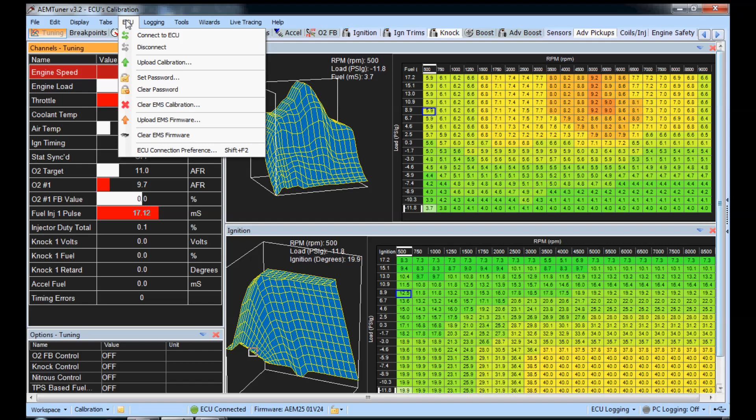So go up here to ECU, upload EMS firmware, and it shows here what you're currently running, 1.24, and what you're going to go to is 2.02. And you don't have to upload a calibration. I'm just going to throw this in here. It doesn't matter which one. You don't have to do this right now. You can do this after you've done the firmware.

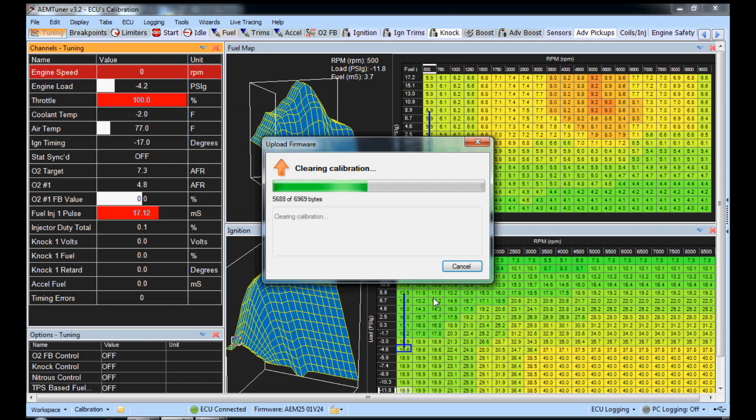So click OK. Now, make sure that you do not lose power to your ECU from your car. Like if your battery has low voltage and you lose connection during this process, you have to clear the EMS firmware. It's a problem. If you have USB connection problems during this process, you have problems. So just make sure that you have good battery voltage everywhere, and also make sure that your laptop is either fully charged or not about to die.

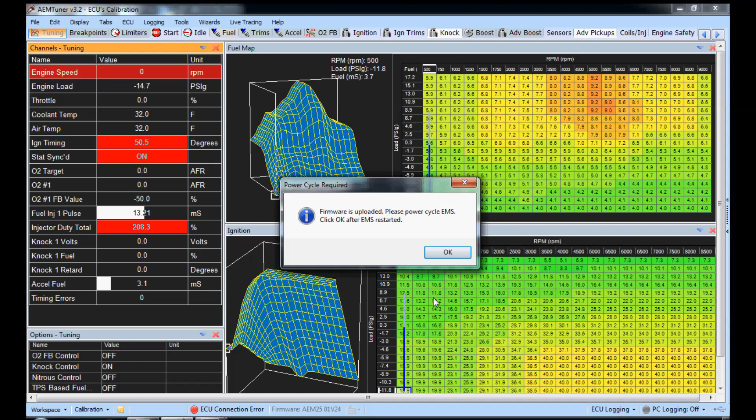So if you lose connection during this process, it's kind of a pain in the butt to go through, but it is possible. So if you do get connection errors or something, I'm going to make another video for that. Don't worry, I got you covered. So power cycle the EMS after it's done. Just follow the instructions. Power it back on. Click OK.

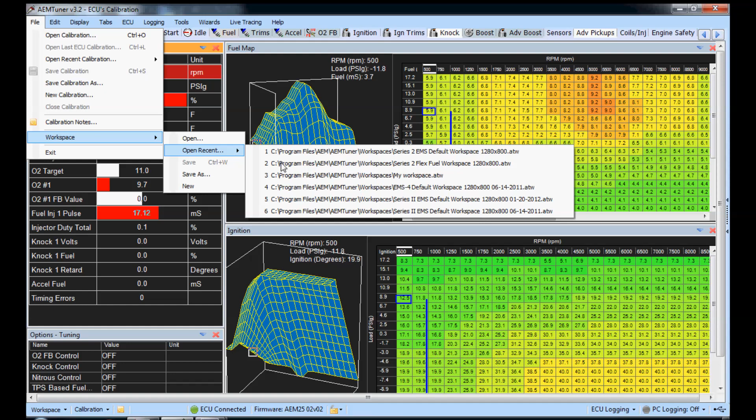Alright. So now you've updated the firmware. Now you'll see down here it says AEM25 2.02 down at the very bottom. So now go up here to File, Workspace, and we'll just use the default Flex Fuel workspace. Okay, so this is how this is going to work. Over here, let's get all this set up first. Actually, sorry, this was my last video, but these should be all your default settings. Sorry, I was doing a practice run.

Anyway, so the first thing you're going to do is you're going to select your input. I highly recommend one of the switches. They work the best, 2, 3, 4, 5, 6. So let's say you want to do switch 3. So we'll select switch 3. That's going to be your input. It's just not shown on here, so go to insert, type in switch. Let's do 3 falling, 3 rising. Okay, so now we've inserted these channels.

So now here's the thing. One of these needs to have an edge, whether it be falling or rising. So you could have the falling edge on, you could have the rising edge on. It doesn't really matter however you do it, but just know that one of these needs to be on. I've used on both of them and it works, but it seems to be a little smoother signal with one on and one off. So you got that on. Switch 3 is your input.

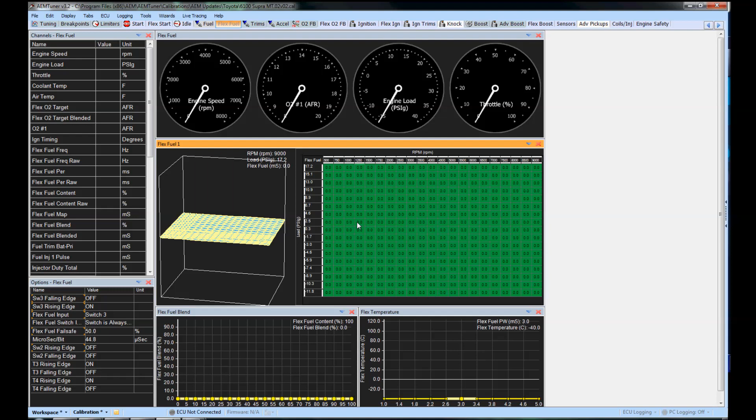So this is your flex fuel map, right? These are your values. So if we were going to start from scratch, let's select this whole thing, put it in here. Come on, come on. Okay, and then let's just add like 20% or something. AEM Pro style. Okay, so we just added 20% to the whole map. It might be closer to 30 or something like that, but whatever. This is just a demo.

So what we did is this is going to be our flex fuel map now. They're two completely separate maps. So what you're going to do is you're going to blend in between these values. Oops, sorry. Dang it. In these values. Oops, doggone it.

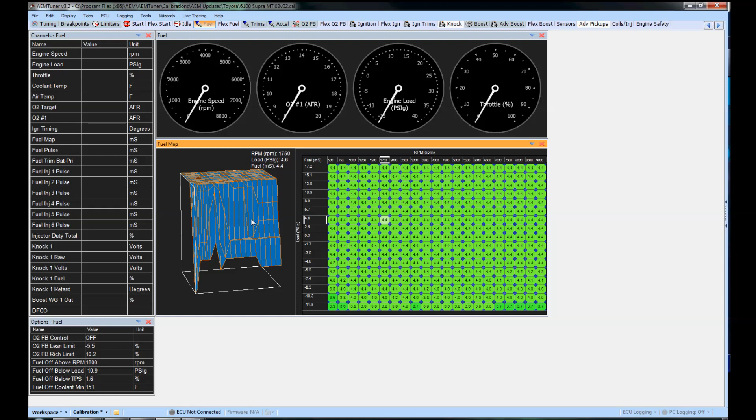It's because it did the copy and paste thing, but in between whatever these values were and whatever these values are. Okay, so the next thing we need to do is set up this one. So let's say that you're primarily going to be running E85, and this right here is going to be the map that you tuned 100% on E85. Okay, so we'll get the E85, we'll set these, oops, we'll set them to 100.

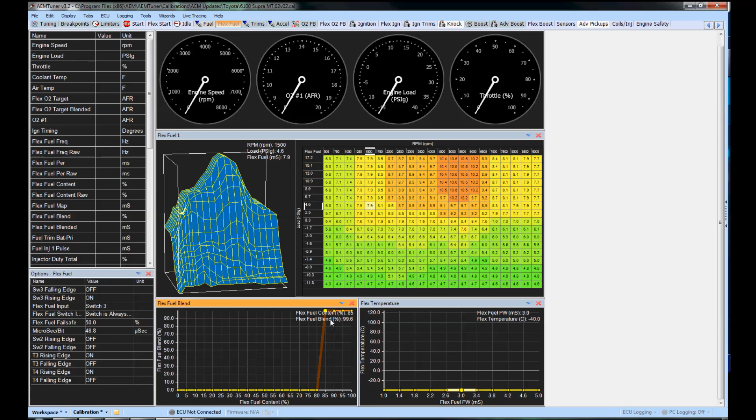Okay, so what we just did was, whenever your flex fuel content coming in, and it'll tell you right here, is 85% or higher, you will be running only the values in this fuel map. It won't have anything to do with this fuel map. Okay, and then everything in between, right there, is going to be blended.

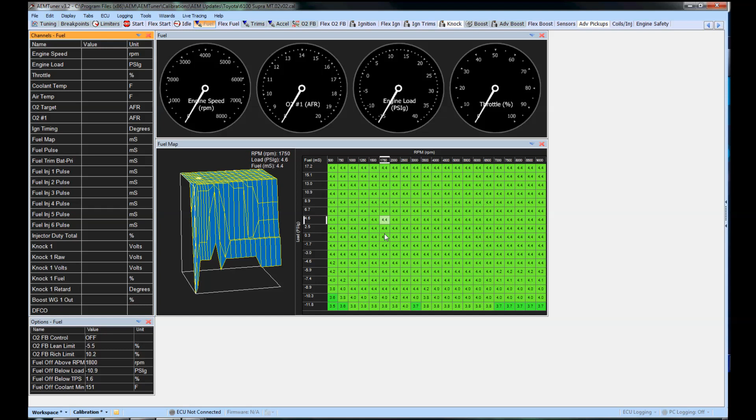So let's say you're on 50-50 right here. Then that means you're going to be running a 50-50 blend of, let's say at zero, basically at atmospheric at 1750, at 7.9, right? And then if you go over here, 0.3 at 1750 right here. So it's going to be running a 50% blend in between this 4.4 value, this pulse width, and this pulse width. Okay, so it's a mediary point, so it's blending between these two maps.

It says, okay, this is my E85 map, and this is my pump gas map, and I'm told that if I'm at 50%, I'm going to be right in the middle of these two maps. So it makes a calculated value. Now, if you guys were going to be doing like E100 or something like that, and you want a really fully blended table, you can just do something like this, if this map right here represented a 100% ethanol blend, not an E85.

This one right here, this flex temperature, this is only for logging purposes, but it is really helpful for knowing fuel temperature as it's returning back to your tank. Again, there's no trims based on this, and this table will depend on what sensor you have. But if you get the one from AEM, or you can look it up online, they give you what it should be, the temperature versus the MS on this. So really helpful to log.

And then let's see what else we got. We'll start over here, flex start. So now you can see I already did that one table, and it takes the values from this table and it puts them right here, same table. Okay, now these are all your flex start maps. So if you're running 100% ethanol, you would be using all of these maps and none of these maps. Make sense? Hope so. Pretty simple.

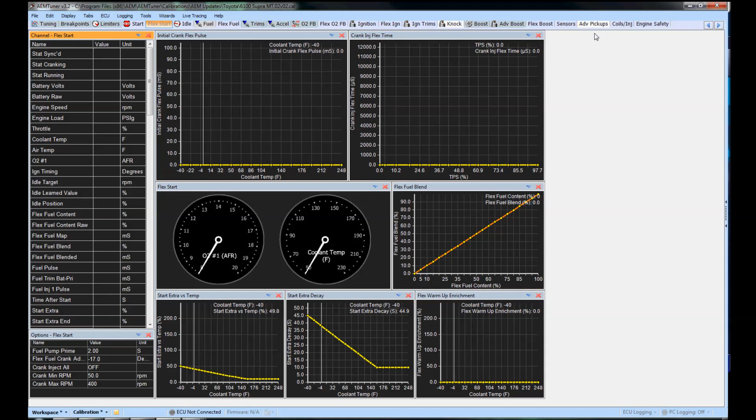What else we got? Flex start, flex fuel, flex O2 feedback. Same thing. Look, it's already set up. Runs that same map. And then, these were all the default values, right, for gasoline. You can copy and paste this map right into here, and it's a good starting point.

Flex ignition, same thing. Now this one does not take from the fuel map, but you can set it up the same way. So let's say I had it at 100, didn't I? Just to keep things the same here. So Control-Alt-H, boom. Okay. So now, whenever you run an E100, whatever values are in this map is what you're using, versus this map, which is pure pump gas, and it blends in between the values of these two maps.

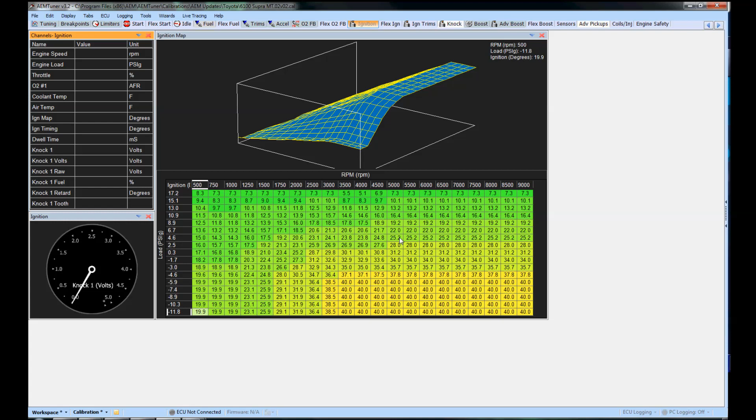You've also got flex boost, and I already had this set up from last video. So let's say you're at 20 here. Again, this map is not the same as the other two. It's got its own. So we'll set this to 100, and then we'll make just a nice blend. So if you're running E100, you're using this map for boost target gear, 100%, versus whatever this is, I set it to 15 on pure pump gas. So it blends in between 15 psi and 20 psi.

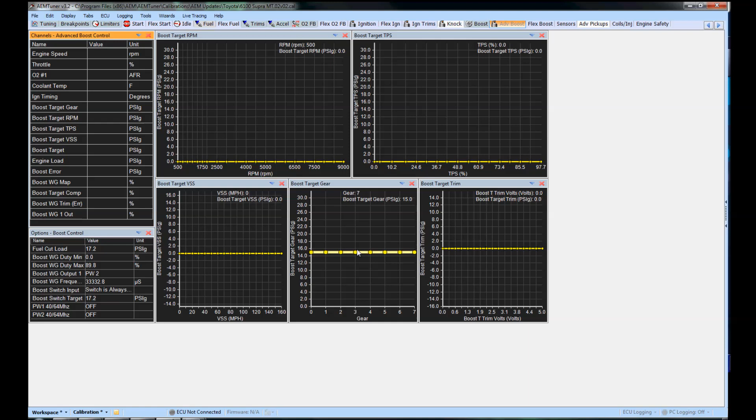And I think flex fuel O2 feedback, flex ignition, I think that's it. The primary stuff is going to be in here, blending your fuel and whatnot, and getting your ignition ready. Yeah, and then you could just take these values and increase them or whatever. This is just for demo purposes, but something like that. And then this would be your E85 map.

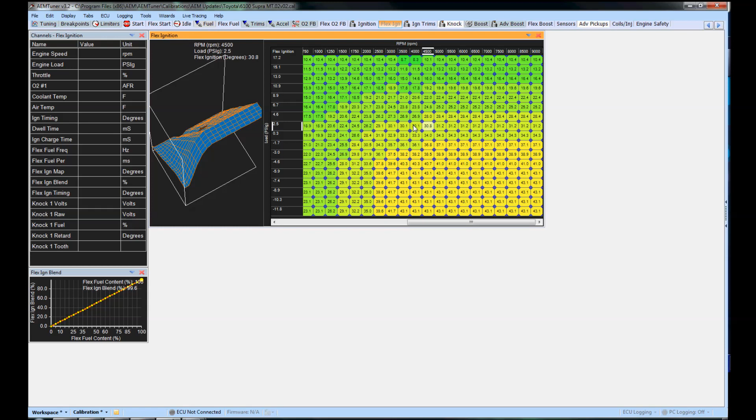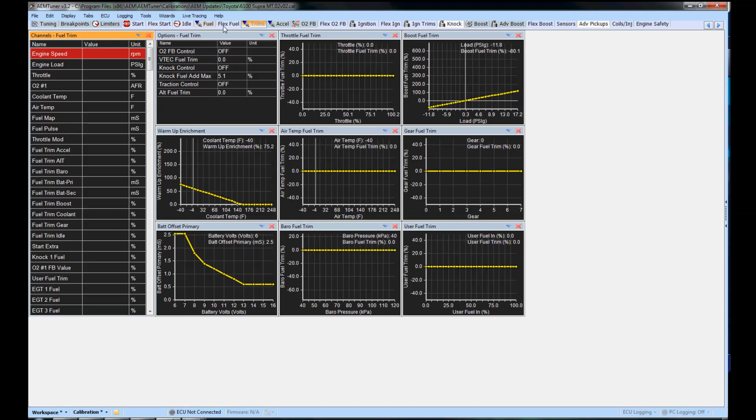But that's it, guys. It's really simple. It's really straightforward. There's not a whole lot to it. It's a simple concept, and it works really well. So spend some time, tune your car 100% on pump gas, and your timing 100% on pump gas, and then get all these set up. Then get E85 or something higher, and then tune this map, and then tune your flex ignition, and then all you're going to do is blend between the two tables. Works great.